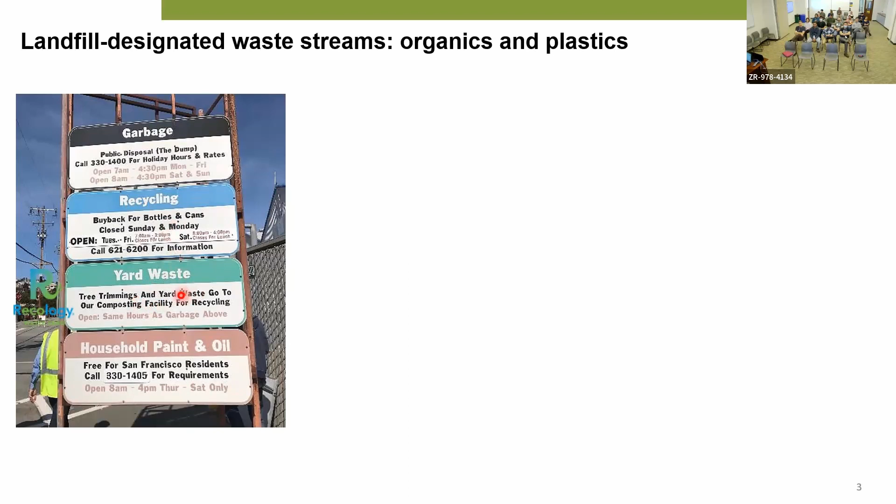So just to introduce the feedstock I have been working on. As you know, we have those three bins generally in our household: black bin for landfill, blue bin for recyclables, green bin for compostables. My focus is only on the landfill designated municipal solid waste. Based on this EPA report, you can see still a considerable amount of the material is organics, including paperboard, trimmings, and food, which account for almost 50%.

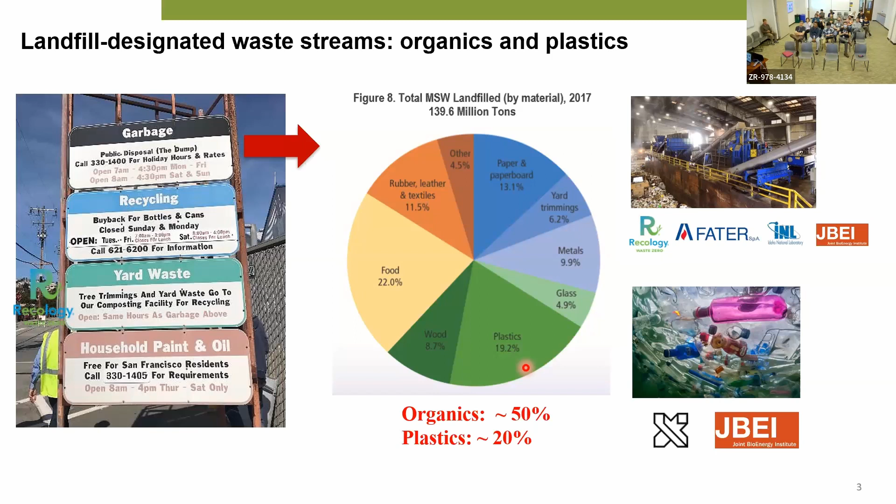So we have partnered with both national labs and industry for organics conversion. Another major component is plastics, which accounts for 20%. We are currently working with a startup company in the Bay Area called X, and also JBEI researchers on this topic. So I'll go through these two categories in the next session.

So let's take a look at conversion of organics. I have 3 case studies here. The first one is about MSW blends conversion, which actually started at JBEI when I was a postdoc here. Then conversion of landfill designated organic streams, that's a partnership with the local waste management company Recology. And the last one is upgrading post-consumer absorbent hygiene products.

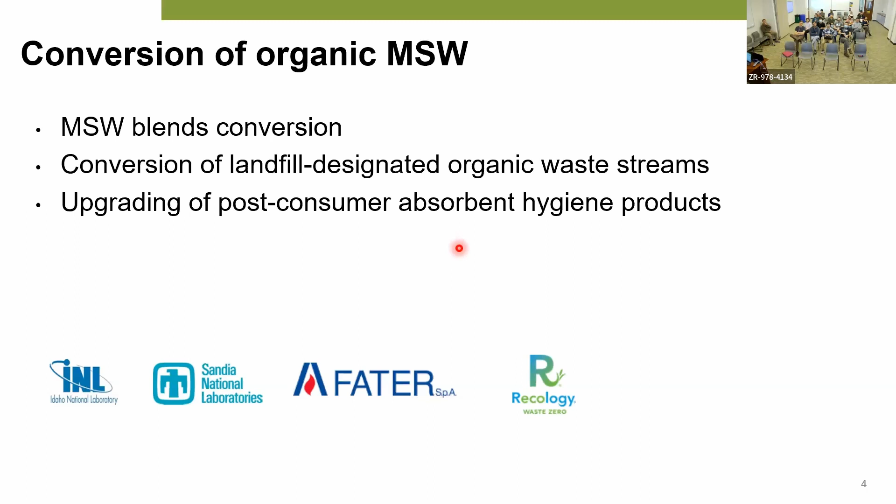Many years ago, we started this project with Sandia National Lab and Idaho National Lab to look at MSW blends. Here you can see this is non-recyclable paper procured from a waste management facility, basically from the landfill waste, and also yard trimmings. As you can see, there's still a significant amount of yard trimmings in the landfill waste streams. Idaho National Lab procured those feedstocks, blended them with our model feedstocks, corn stover and switchgrass, and also did the cost analysis.

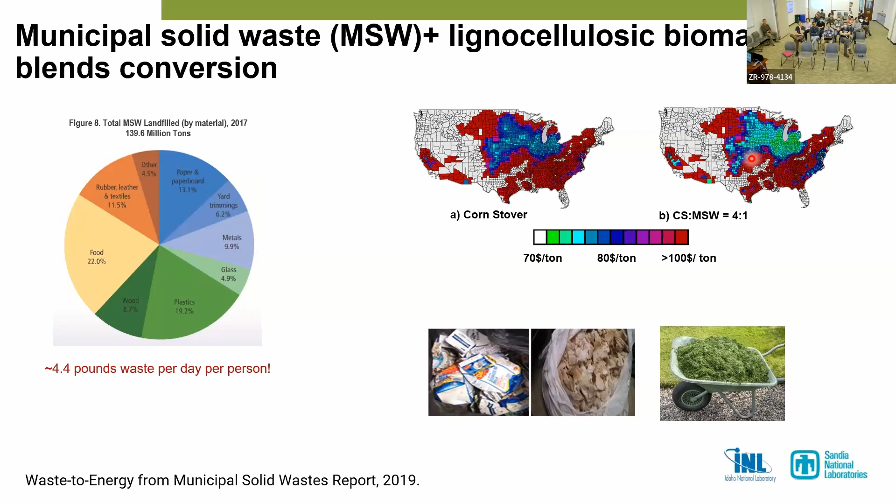As you can see here, with blending of MSW, we have many more regions which can provide the feedstock at lower cost. So we wanted to evaluate how that impacts the conversion side. At the beginning, we applied the ionic liquid-based acidolysis process developed here at JBEI. Basically, we do pretreatment using imidazolium acetate, and afterwards we lower the temperature and directly add acid, hydrochloric acid, to start the hydrolysis process. This is enzyme-free, using acid instead of enzyme for the carbohydrate to sugar conversion.

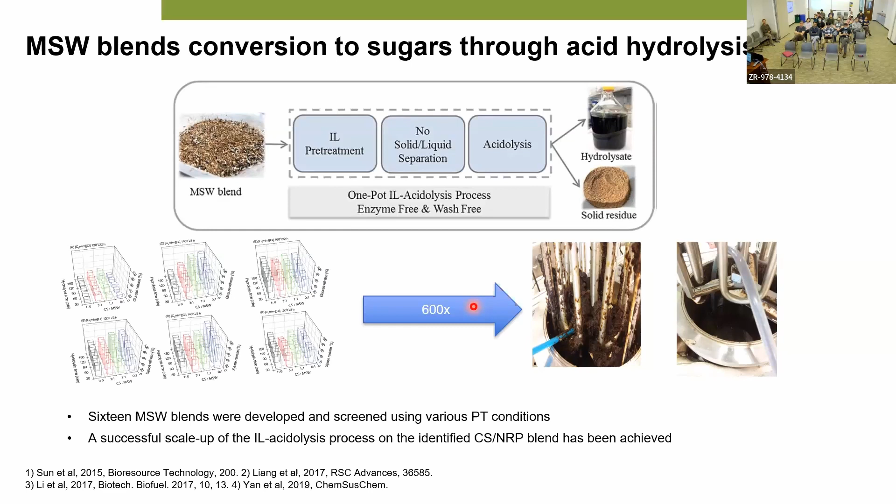And then we got the hydrolysate and solid residue. We tried different blends, in total 16 MSW blends, also with different pretreatment temperatures and other conditions, and basically optimized that process for MSW blends. Eventually we got around 80% sugar yield, slightly lower than enzyme, but the advantage is using cheap acid instead of expensive enzyme. At that time I worked with ABPDU on scaling up this process. Using a 10-liter Parr reactor, we successfully scaled it up and published a few papers.

Later on, after I moved to ABPDU, we continued working on this project, and we applied the cholinium lysinate-based conversion process, which uses cholinium lysinate in water to convert the biomass to sugars, and then used an engineered E. coli strain, also developed by JBEI researchers, to convert the hydrolysate to medium chain length methyl ketones, which are a diesel precursor and can also be directly used as a blend stock.

So this study tells us basically MSW didn't inhibit the conversion process compared with the control feedstock. And this demonstrates the potential of using low cost or negative cost MSW, because in waste management, if it goes to landfill, there is a tipping fee involved. So in some cases, we can consider these negative cost waste streams, and use them as a blending agent to supplement the standard biomass and reduce the feedstock cost.

So in the future biorefinery, I think, after those years, MSW is starting to attract more attention, especially to be able to lower the feedstock cost in the bioconversion process. The next few slides are about the collaboration with Recology, a waste management company headquartered in San Francisco. They reached out to us because they read some papers we published on the MSW blends.

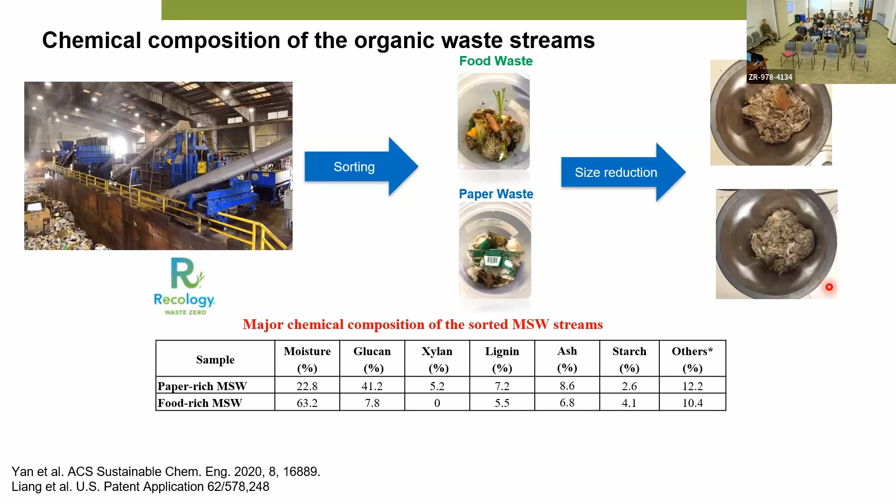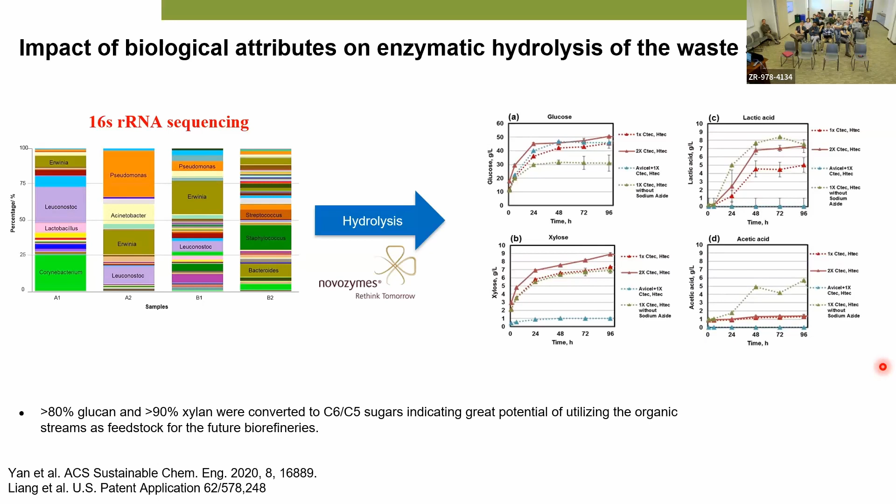If you are a parent, you know how many dirty diapers a baby can generate on a daily basis. And when we visited Recology and also other waste management facilities, they said diapers are a headache for waste management because they entangle. For example, the plastics and the material will kind of entangle with their mill or some equipment, which causes a lot of problems.

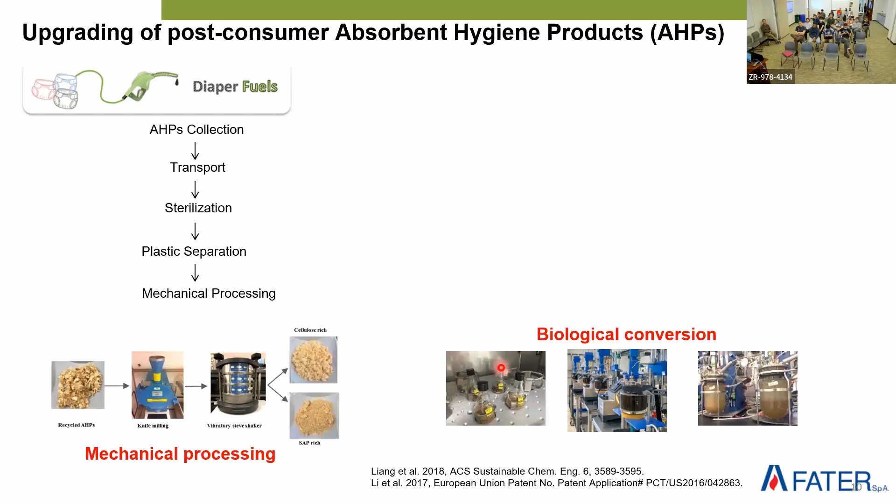So after this mechanical processing, we also did a biological conversion through enzymatic hydrolysis and fermentation to produce bioethanol as a proof of concept. A few years later, they were able to actually develop this pilot plant in Italy accommodating basically the mechanical processing, not the biological conversion. So in Italy, they set up these smart bins to collect used diapers from consumers, and then pass them through their pilot plant.

I think on a yearly basis, this is from their website, they collect 150 tons of used diapers in that city, and they avoided 62 tons of CO2 and produced this much secondary feedstock, including plastics, absorbent material, and cellulose. So cellulose can be used, like they use it to make books. So diapers to books.

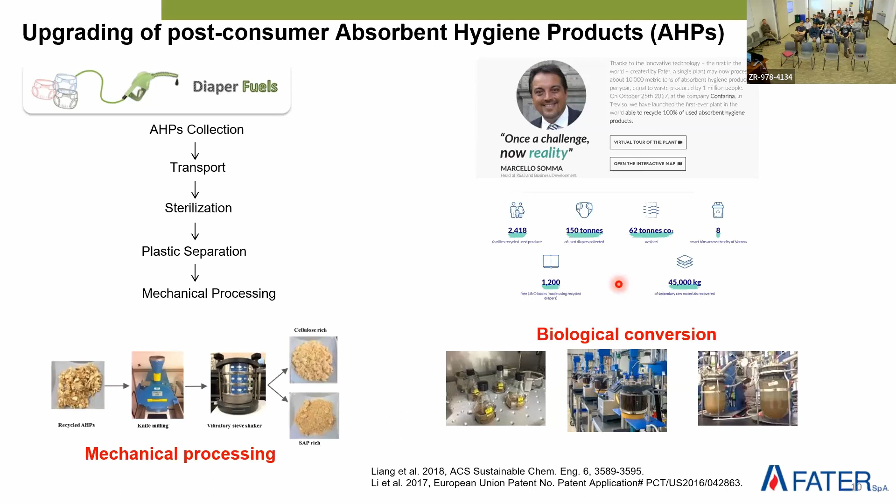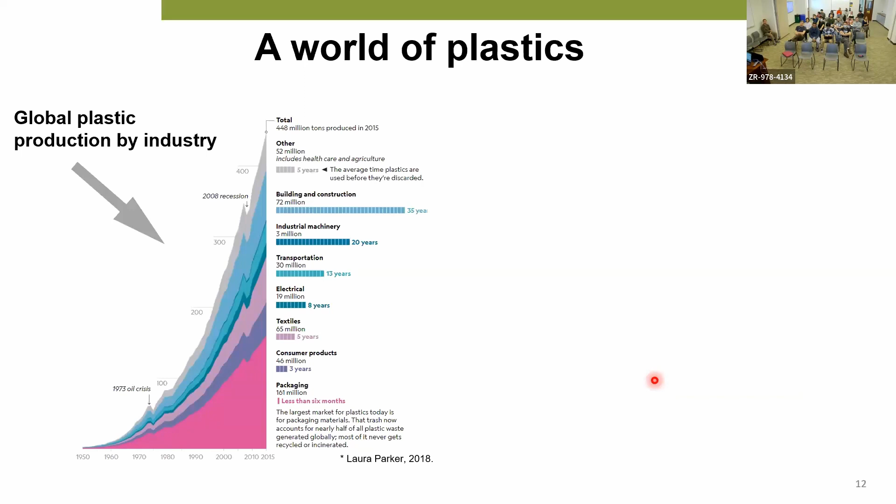So in the next couple of slides, I'll talk about the current ongoing project with X and JBEI on conversion of plastics. I'll go through why we chose polyesters and the depolymerization, biocompatibility, and TEA analysis. As you can see here, plastics are everywhere. During the past half century, plastic production has dramatically increased. However, most plastic has a very low recycling rate. Even PET, with the highest recycling rate, is still only 18%. The majority of plastic ends up in landfill or leaks to the natural environment, causing a lot of environmental issues.

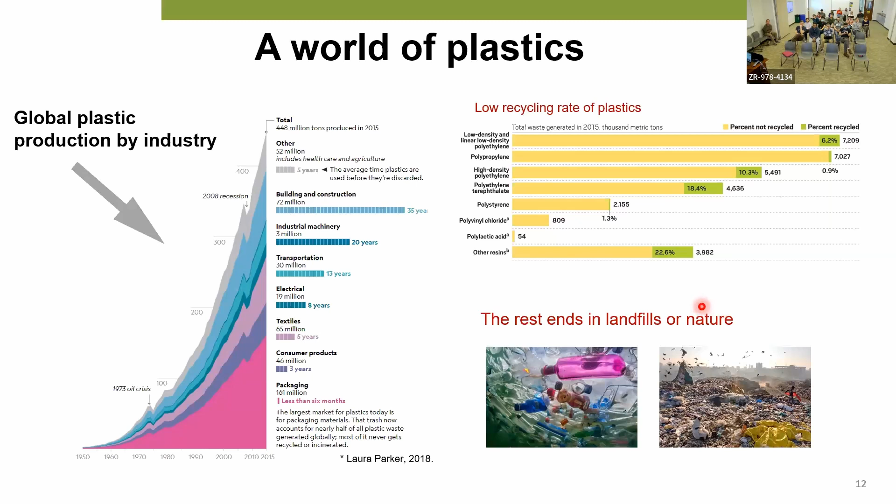So we start with polyesters because these are relatively easier to break. We chose PET and PLA. PET, as I mentioned, is a major component in plastics, accounting for 50% of polyester, and only has below 20% recycling rate. During current mechanical recycling, the PET loses molecular weight, so that's a downcycling process. The quality of recycled PET is not as good as the virgin resins.

PLA is the largest product sector of bioplastic. However, PLA can only be degraded under industrial settings with high moisture and temperature. PLA production right now is small, but it keeps growing. So PLA can be a contaminant to the PET streams. So we start with PLA and PET for an ionic liquid based depolymerization process.

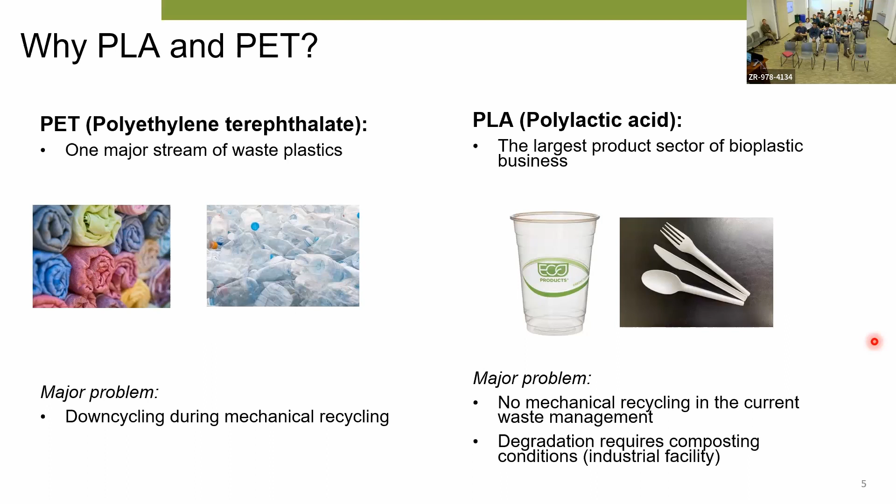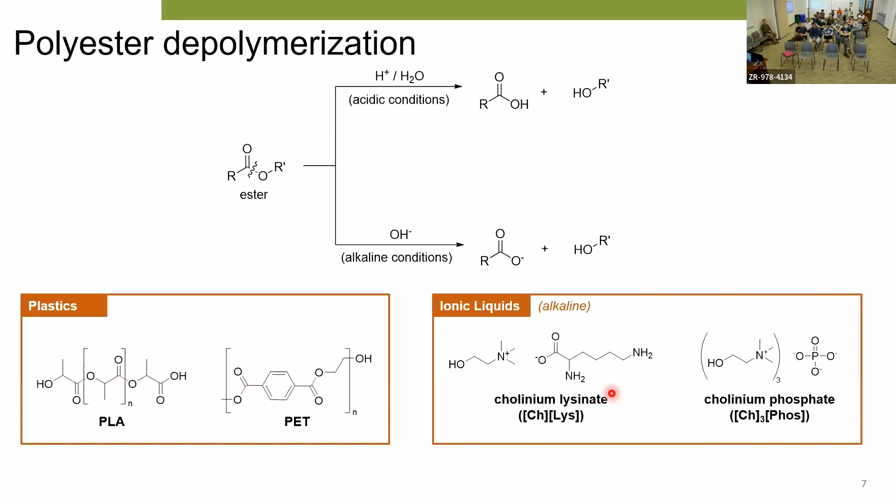If you think about polyester bonds in a water environment, the ester bonds can be broken in either acidic or alkaline conditions. So we chose 4 ionic liquids, including alkaline, choline based ones, cholinium lysinate and cholinium phosphate, and also 2 more: imidazolium acetate, which is neutral, and imidazolium chloride, which is acidic, to evaluate the polyester depolymerization efficiency.

On the left side you can see the polymer depolymerization. On the right side is the monomer yield. We reached around 50%, 40% for both polyesters, and you can see the terephthalic acid yield is a little bit lower for PET. That's due to oligomer formation during this process, which has been identified using GPC. Because the product is only analyzed using HPLC, we cannot quantify those oligomer products.

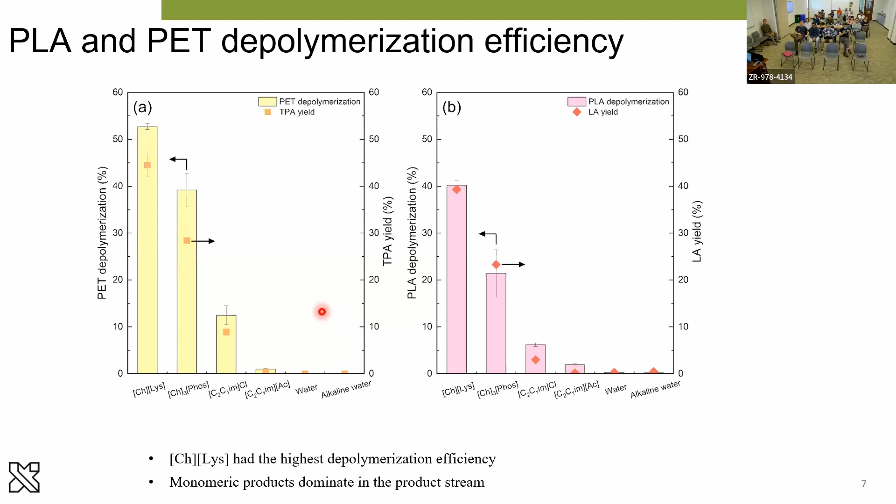We also used simulation, computational methods. I want to mention also here, we compared it with water, because choline lysinate is basic in 10% choline lysinate in water. So we also used sodium hydroxide to adjust the pH to a similar level to compare, but you can see clearly it's not just the pH. So we want to understand how the liquid interacts with polyesters.

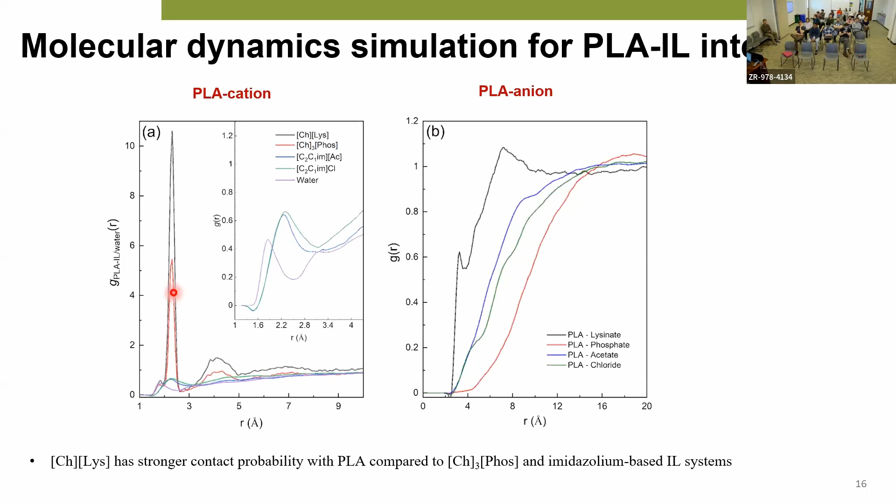So the simulation results actually aligned with our experimental data, showing choline lysinate has a stronger contact probability compared to other liquids. We move to the polyester mixture using choline lysinate in water. You can see with the increasing of the liquid loading, we got higher depolymerization or higher product yield.

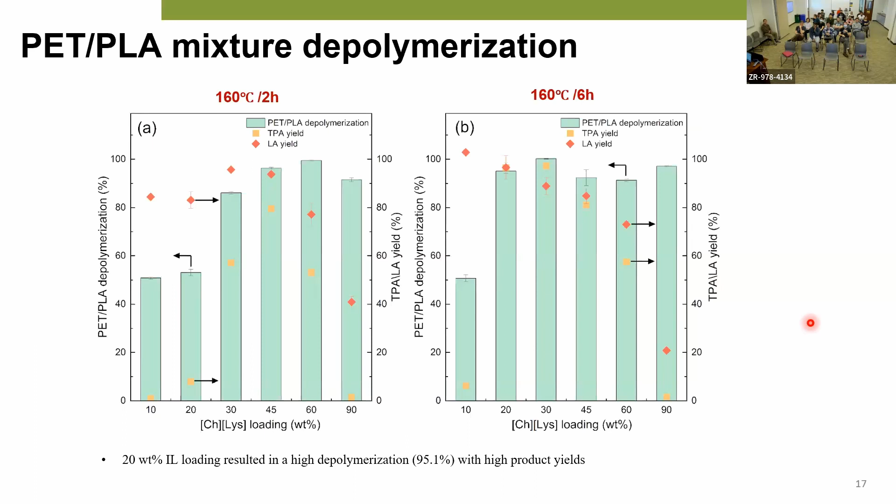Because we all know we need to recycle. Generally, we need to recycle our liquid about 99% in order to make it economically viable. So we want to minimize the liquid usage. We're basically increasing the reaction time. By doing that, using 20% of the liquid, we were able to depolymerize about 95% of both polymers, and also get pretty high monomer yields.

And so we got the depolymerized monomers. The next step is to evaluate the bioconversion of the product, the monomers. So initially we used this Putida strain, which can only catabolize lactic acid. As you can see here, the growth for lactic acid and depolymerized PLA is similar to glucose, but for the depolymerized PET, it's mainly due to the presence of ionic liquid.

Recently, we worked with the JBEI team on using this engineered Putida strain, which can catabolize both PLA and PET, and we showed decent growth curves for both depolymerized PLA and PET. So after depolymerization of the plastic mixture, we can use both monomers as a carbon source for bioconversion. Using the aqueous biocompatible liquids allows us to directly utilize the depolymerized streams for bioconversion. And in the future, this stream can produce PHA.

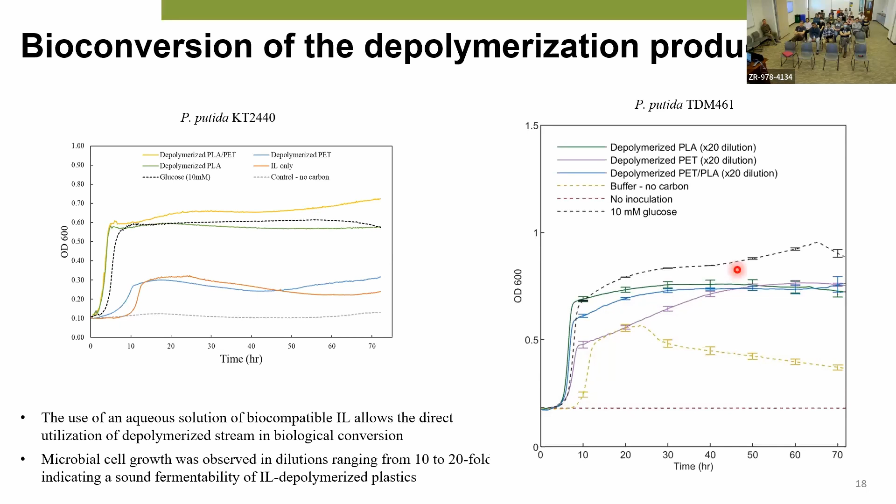So in our techno-economic modeling, we established this process to convert PET and PLA mixture to PHA, which is truly biodegradable plastic. The process goes from the MRF station, where we get the sorted PLA PET mixture, and through this one-pot conversion process for both catalysis and bioconversion, we produce PHA as a final product. On the upper side, you can see the minimum selling price of PHA. In our current state of technology, it's still pretty high compared to sugar-derived PHA. This is based on current literature data and our preliminary catalysis data.

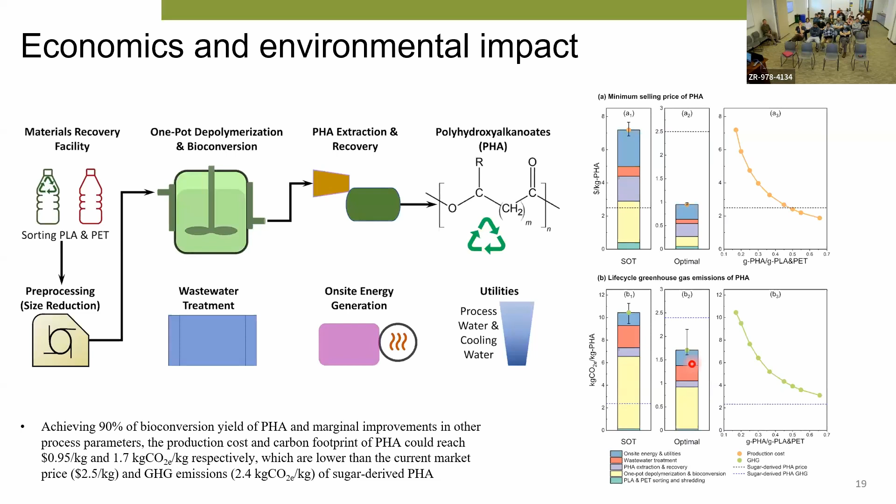However, in the optimum case, if we assume 90% conversion, especially 90% bioconversion, and also higher solid loading and lower liquid loading, we can lower the PHA cost below around $1 per kg, which is much lower than the standard. Similarly, for GHG emissions, the SOT is still higher than sugar-derived PHA. However, in the optimum case, we showed very promising GHG emissions as well.

Right now, we are working with X to do high throughput screening of different liquids for PET depolymerization. Basically, we want to utilize X's machine learning capabilities and pass whatever commercial liquid we can get from the market into this pipeline, to train the model and identify the optimum liquid structure which can depolymerize PET as a starting point.

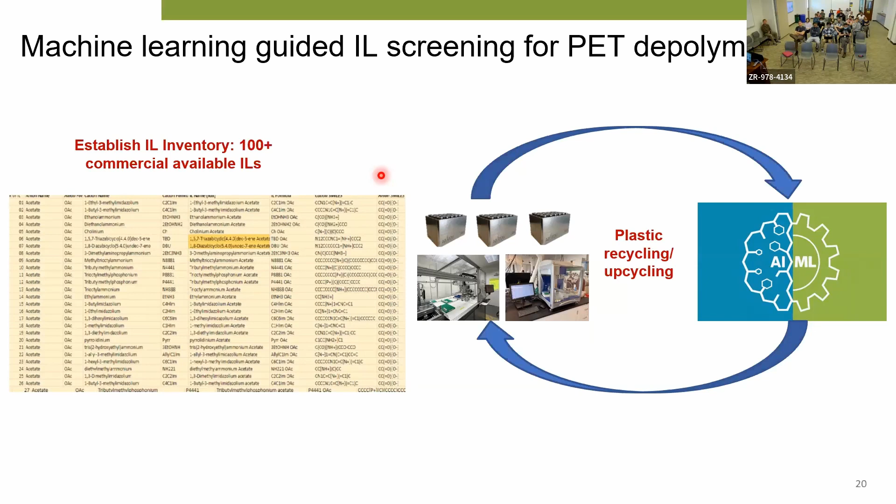So right now we have about 100 liquids. Chang is leading this effort. So if you are interested in certain types of liquids, feel free to reach out to us. We have very small quantities right now, but we're happy to work with anyone who is interested.

In the next couple of slides, I want to give you a brief summary about lignin depolymerization and upgrading. I know lignin depolymerization and conversion is also a focus of some of the JBEI researchers. The first project is part of the separation consortium, working with ORNL to use membrane filtration to fractionate aqueous lignin streams. In this project, we use sodium hydroxide and choline lysinate as a catalyst to extract lignin from corn stover, and then we pass aqueous streams through different molecular weight cutoff membranes. This is a cascading sequential TFF process, ranging from microfiltration and ultrafiltration up to nanofiltration.

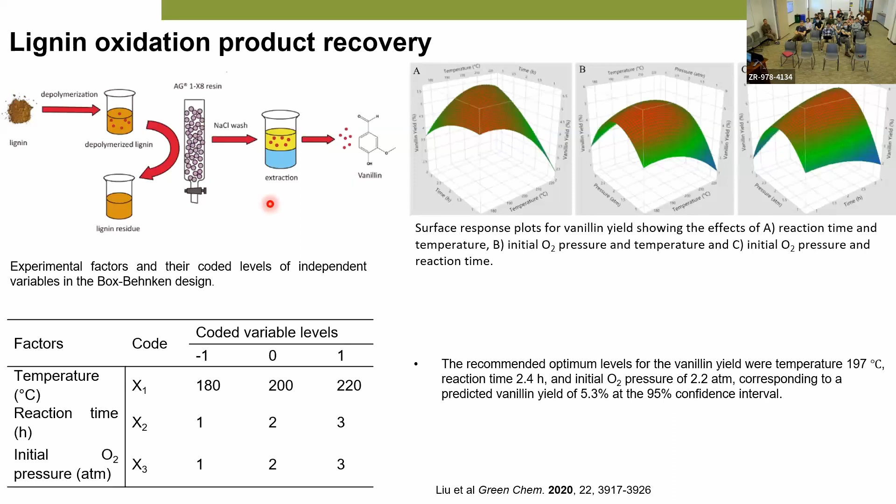The lower yield is mainly due to the kraft lignin, as we know, it's the most challenging stream for conversion. However, we chose this stream because it's readily available and cost is relatively low, so it's more feasible for a larger scale process. On the reduction side, we evaluated different solvent systems as well as catalysts to produce guaiacol and eugenol, those creosols as products, phenolic compounds.

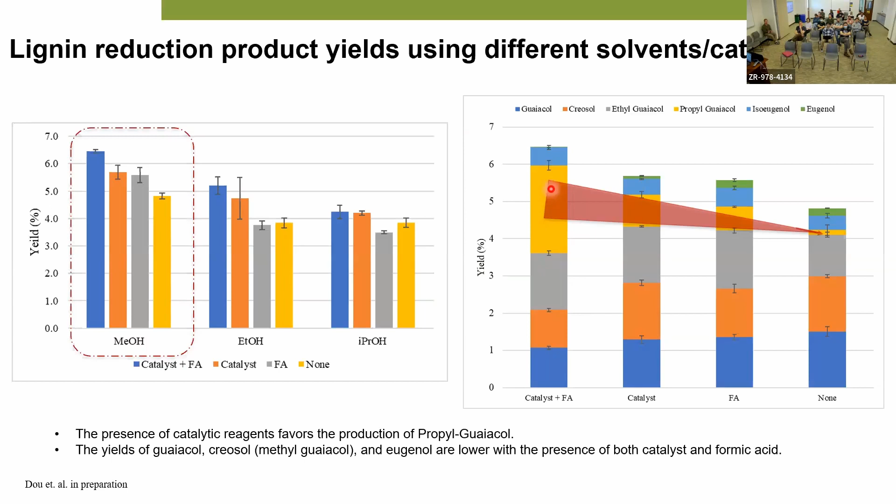So basically, we identified methanol as giving a higher yield, and also by tuning the catalyst, we can tune the product distribution for the chemistry. And the yield is similar to oxidation, around 6% of the total guaiacol yield.

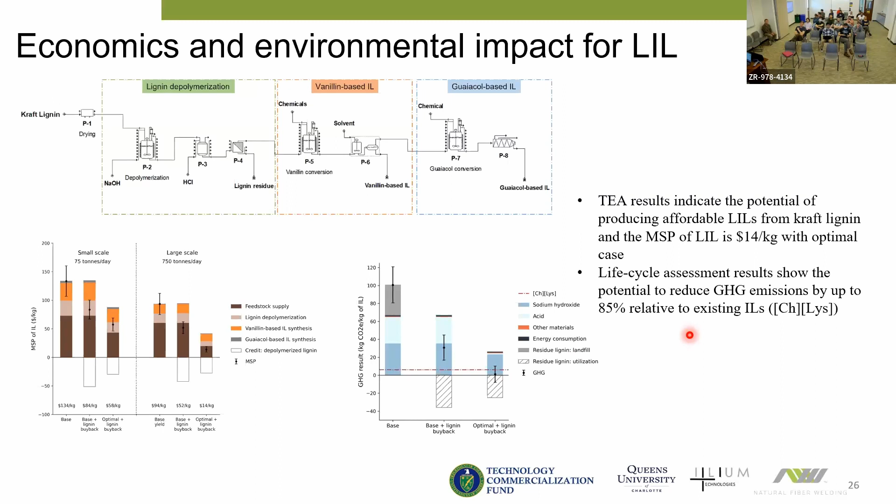And similarly for GHG emission, we showed up to 85% reduction compared to the existing route in the ideal case. All right, that's all for what I want to share today.